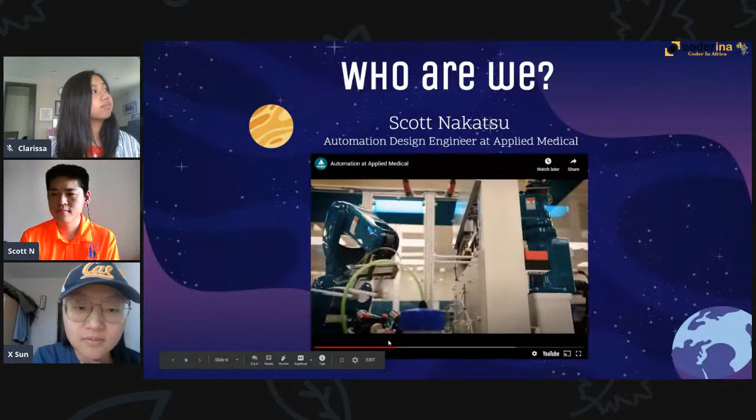Alright, cool. Thank you, Clarissa.

Yeah, so I will begin the presentation with 3D printers. So basically this presentation, the main thing I want you guys to know is the diversity of 3D printing and the many types of 3D printers. So when I first started to learn about 3D printers, I thought it was only the machine that I had seen, but after I got into it, there are actually many different types of machines that can 3D print. There might be some concepts that you don't fully get, that's entirely fine, because what I want you to get from this presentation is really to get excited about this 3D printing technology and maybe think more in the future and maybe change the industry with your knowledge in the future.

Next slide, please. So we'll begin with some types of 3D printing.

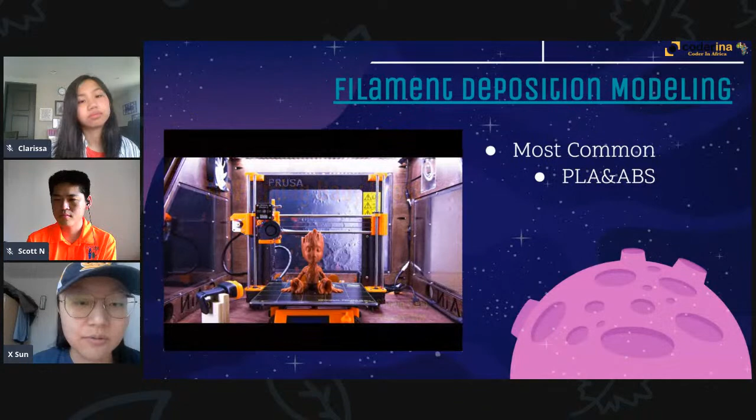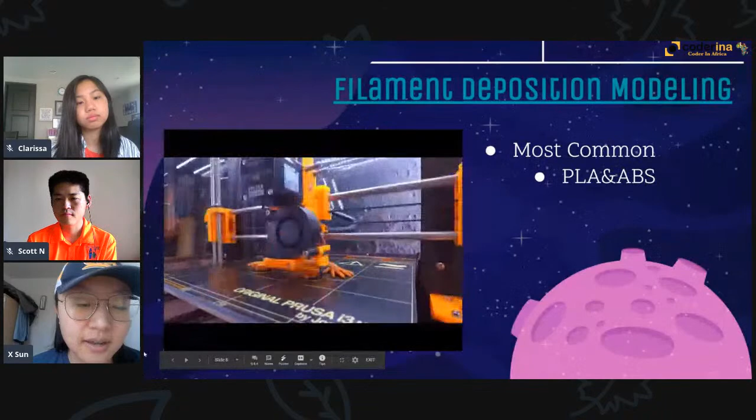So this is the first type we're going to introduce. It's called filament deposition modeling, short for FDM. It is the most common type of 3D printing. You can see how it works: there's a filament coming from the back of the machine, goes into the extruder, which melts the filament and prints layer by layer of the modeling. The material solidifies really fast, so as soon as it drops onto the model, it basically solidifies.

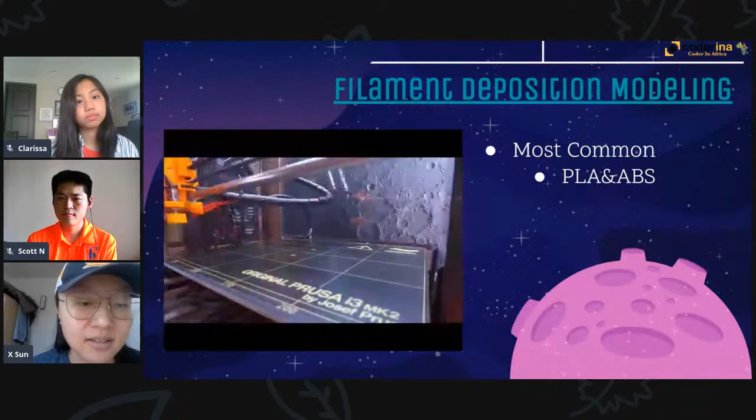A lot of people are using that right now. Many people have them at their houses. I actually have my own FDM machine, just got it a couple weeks ago, and many universities have those in their makerspace. It's really handy when it comes to practice for engineering students for prototypes.

There are mainly two materials that we use with FDM 3D printing. One is called PLA. It is more environmentally friendly, and you can usually get 1 kilogram for $20. Another type of material is called ABS. It's stronger, but might be toxic sometimes, and it's usually used with bigger machines.

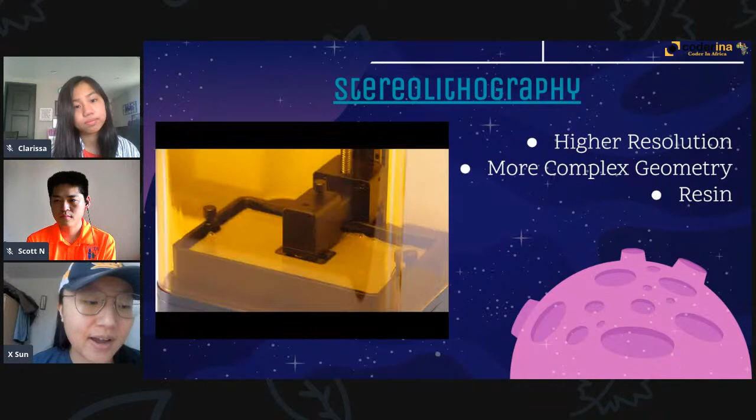Next type of 3D printing I want to introduce is called stereolithography. They use some sort of liquid resin, as you can see. In that resin, there are chemical components that can be solidified after they meet UV light. Those components are called photoinitiators. They are mixed with polymers, and that's the main component of the resin.

You can see these geometries can be printed really well by stereolithography, because if we use an FDM machine to print them, you need some sort of support material under overhung structures. Since this structure only has holes on its surface, it would be hard to get that support material out. But in stereolithography, you can just make holes and the liquid will flow out after you print. So it usually gives higher resolution than FDM, and it can print more complex geometry than FDM.

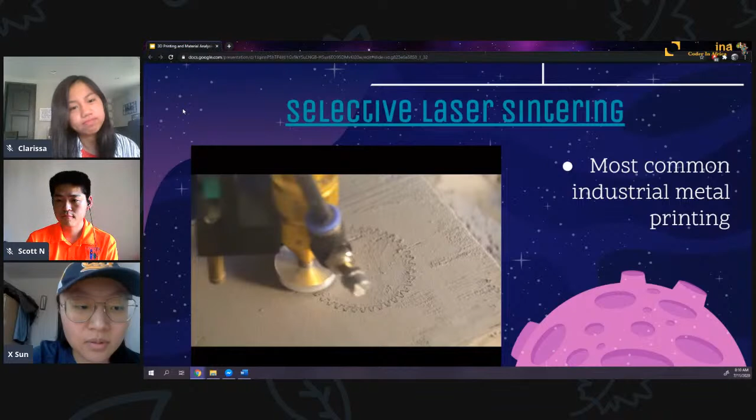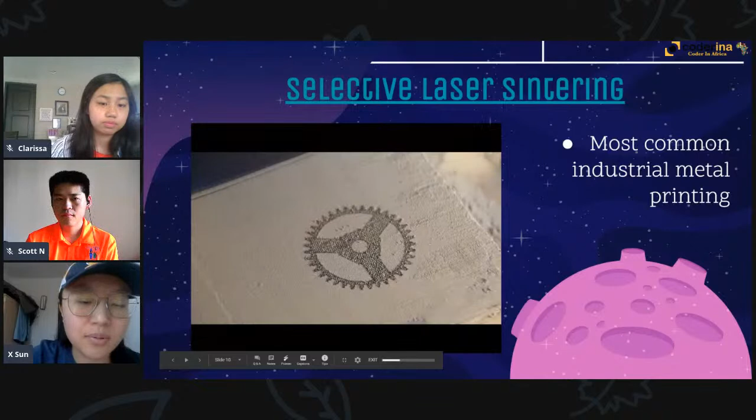So usually what you do after this is printed is melt the part. Usually the plastic melts, so there are pores in the object after you print it. That's a big disadvantage, but we don't really have better technology right now because metal usually has a really high melting point. So if you want to print fast, you need plastic inside the powder.

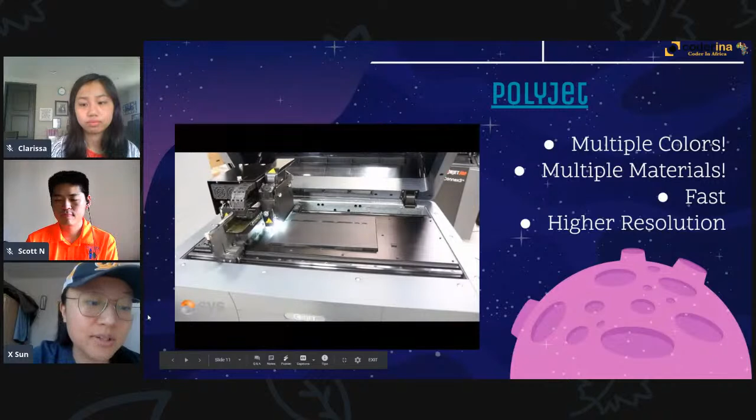Next technology is called Polyjet. It's really only used by one company, so it's not as general as those before it, but it's really cool technology because you can use multiple colors, multiple materials, and it's super fast and gives really high resolution.

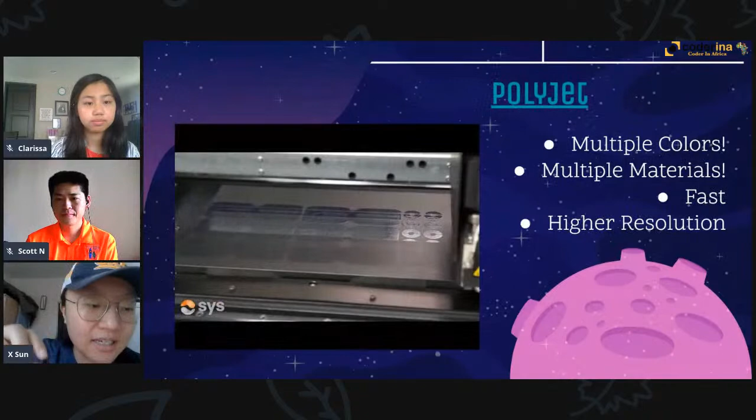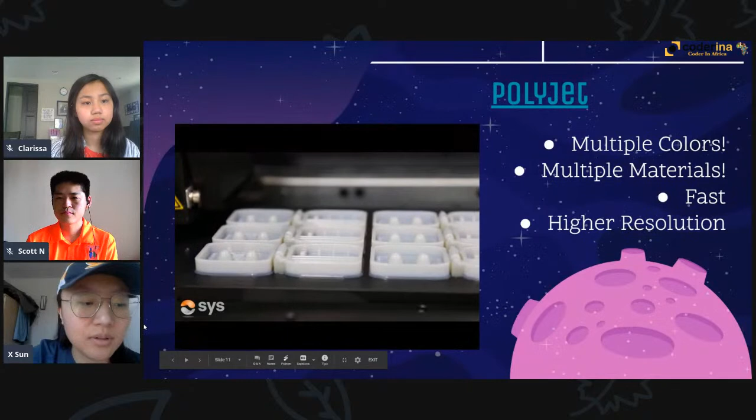How this works is really like your normal printer - a normal printer ejects ink, but this one ejects different materials for 3D printing. That's why it can eject multiple colors and multiple materials very easily compared with others. However, these types of 3D printing usually cost a lot of money because the material is more expensive, and how you manufacture those materials is more expensive because you have to make them into droplets to eject them from the 3D printer.

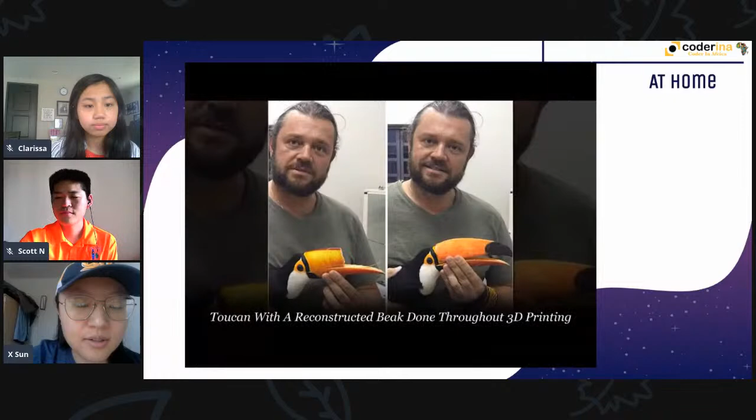So I hope you really enjoyed learning about those types of 3D printing. I want to show you some really cool stuff that you can do with a 3D printer so you can get excited about it.

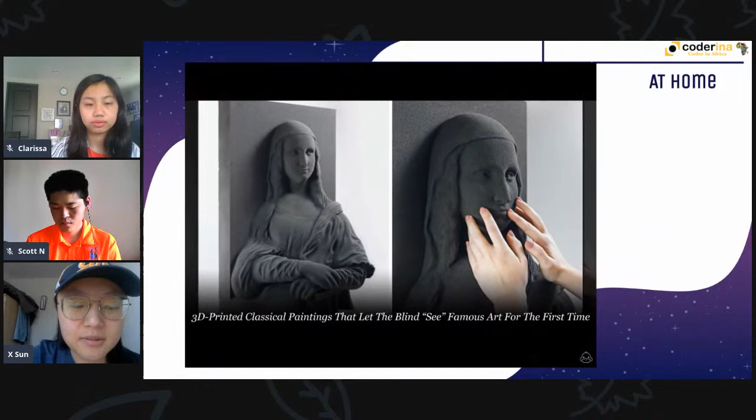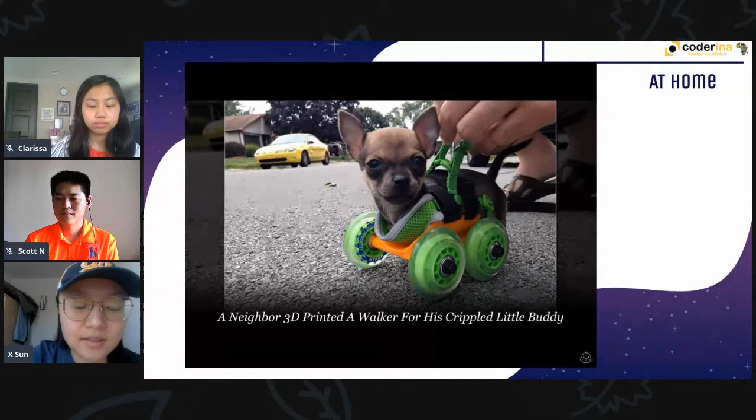At home, people are getting really creative about 3D printing. They can really 3D print everything, mostly from their house, sometimes from an industrial company. But those are some things that can be done by 3D printing really well. A lot of people make hands and legs for people who unfortunately lost them, and those legs and hands are really personalized. So it's a really big advantage of 3D printing to print whatever shape you want.

And this is a really cool thing to give your roommate. Let's see, we'll go for a couple more seconds and then we'll switch.

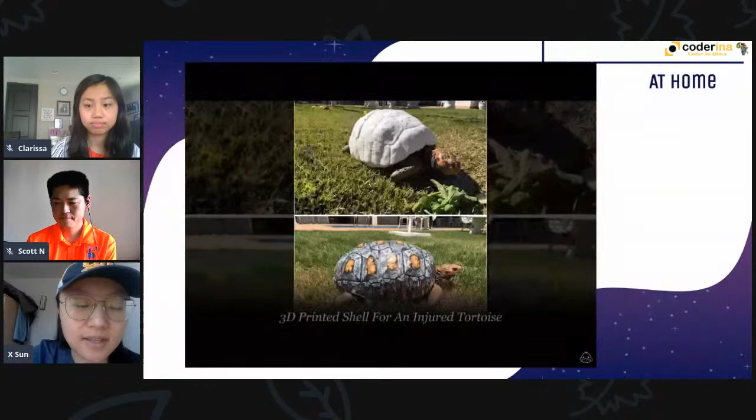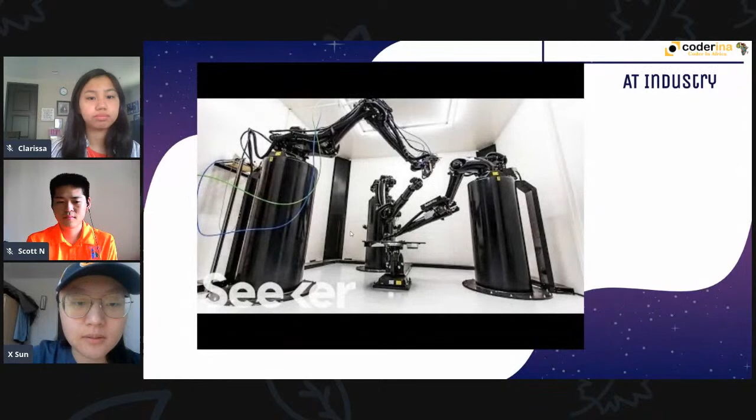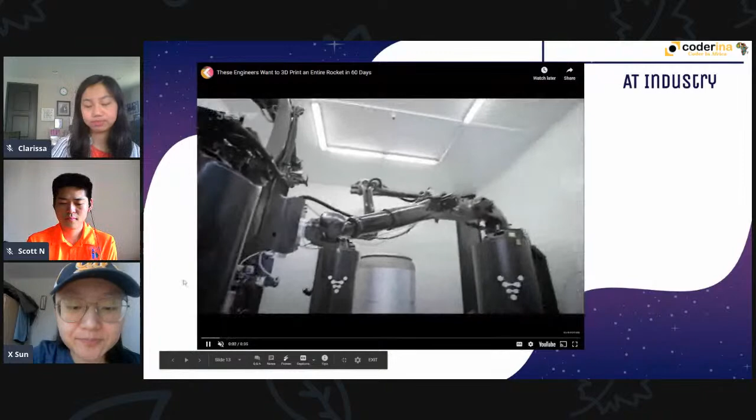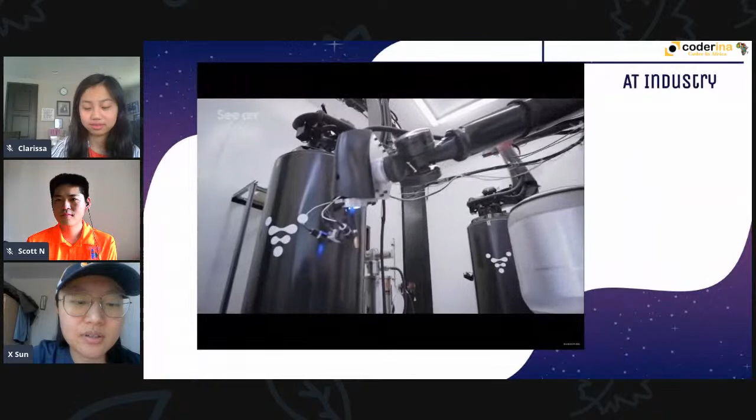So next thing I want to show you is those gigantic robot arms that are used in industry to actually print rockets. They are usually used to make rocket engines, using metals. It's like an extruder, but rated for higher temperature so they can print more pure metals. As you can see, they can print really big engines. And those robot arms, because they can rotate to various degrees, can reach many weird angles to make really fine details.

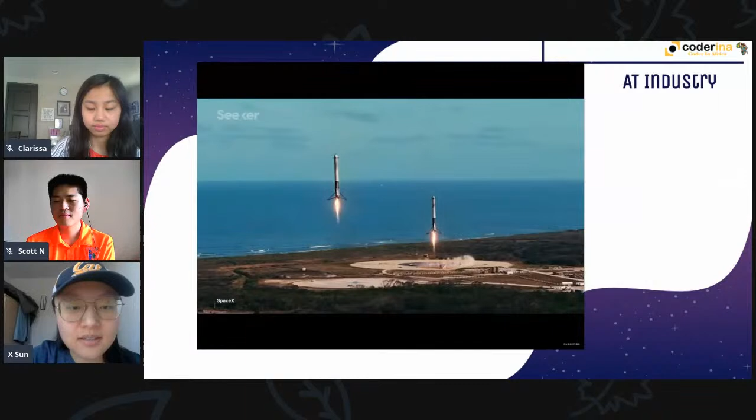Next slide, please. And if you're interested in those videos, YouTube has a lot of those videos.

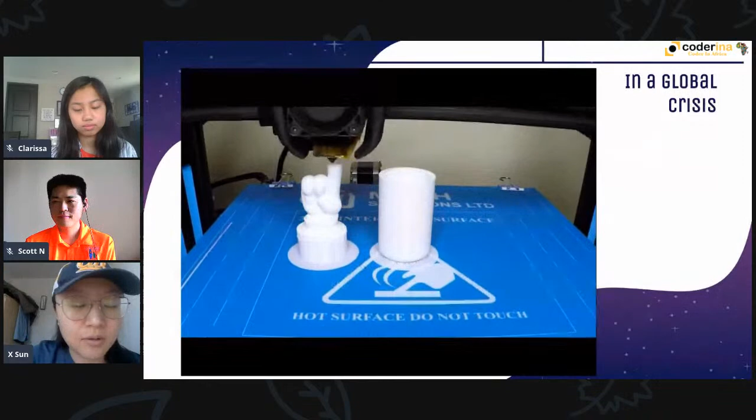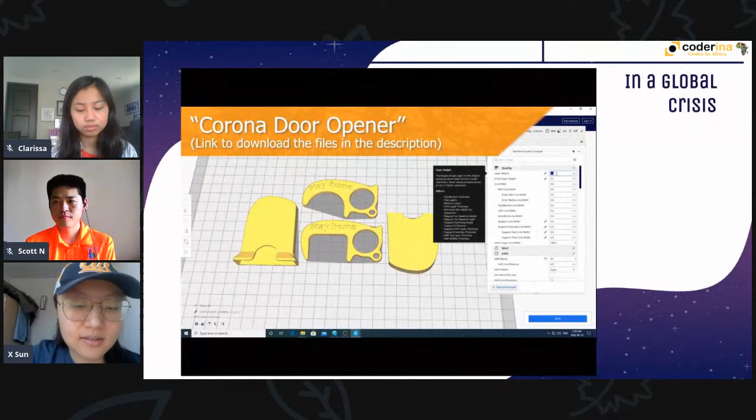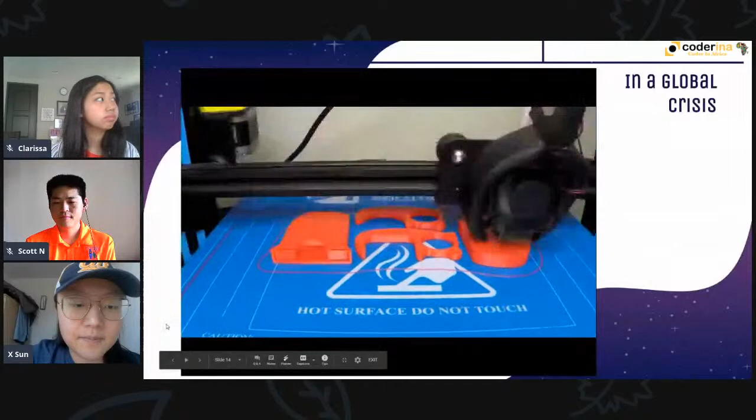So next thing, it's really hard to just ignore the global background when we give the presentation now. But some good news from this pandemic is a lot of people are really using 3D printers to help save lives. Many people are printing face shield straps for health workers and printing face masks for themselves and their friends. That's something you can really do at home, and you can print those and donate them to certain organizations, and those organizations will help distribute them to different places in the world. Actually, Code Orange just printed a lot of those face shields for many health workers in California, and I just really want you to know the power you can have and the cool things you can do with those 3D printers.

Those are door handles. A lot of people are talking about how you don't have to use your hand to open the door now. Let's go to the next slide, please.

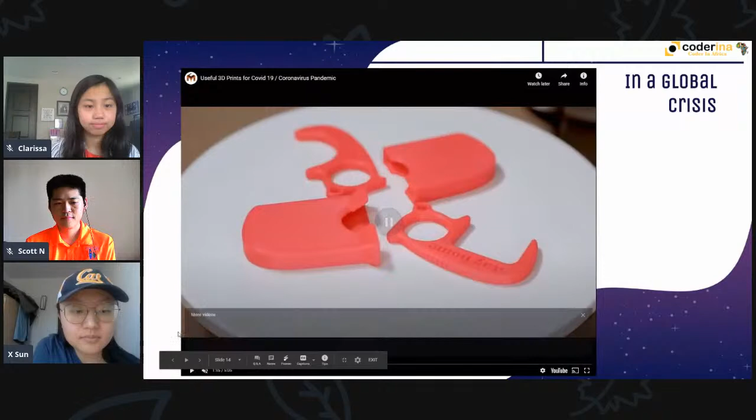So this is a really cool technology I really want to show you because I'm working on this technology right now, but this is mainly from my professor. I saw it in my freshman year orientation, and I just fell in love with it immediately.

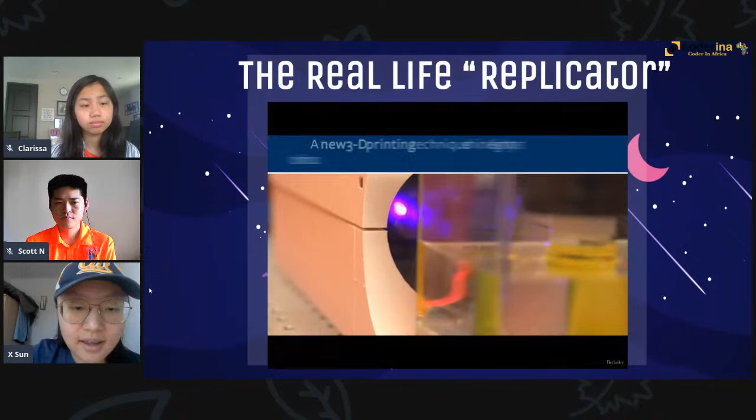It is really cool because normally how stereolithography works and how other 3D printers work is they print layer by layer. But this one, because it has a rotating bottle of resin, can actually print in true 3D. So ideally, every point in this model would form at the same time, so that you get a lot of material advantages. If you have two layers, you sometimes get shear forces that break it. But if you have those two layers really as one layer, then it becomes much stronger.

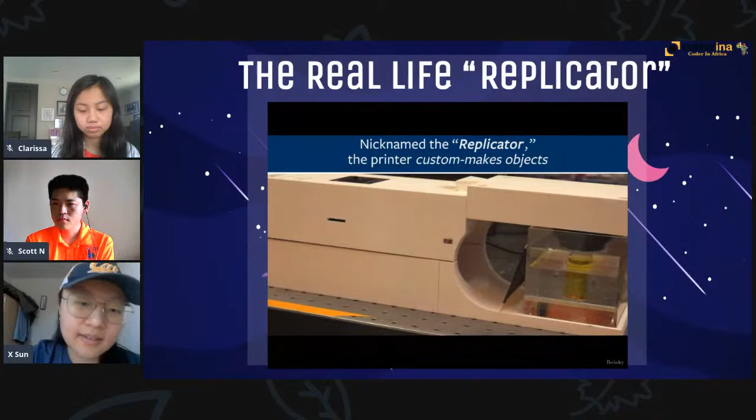And as you can see, they nicknamed that the replicator. In the future, we're really hoping that we can take whatever photos we want of a real world object, and then put that into the projector, and the projector will project UV light that solidifies those resins in the rotating bottle, so that you can just print whatever you want.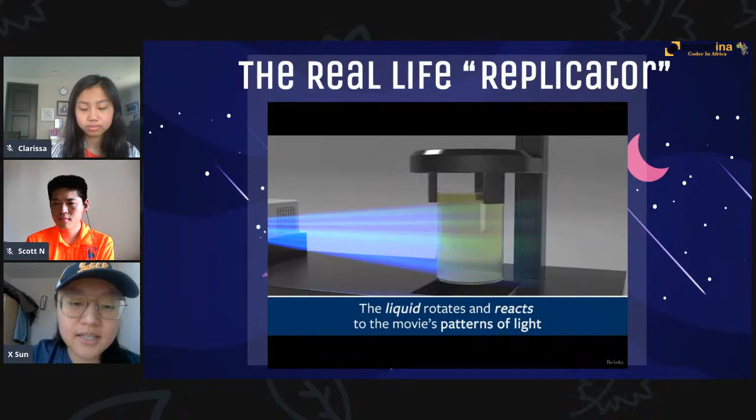And this is how they take photos and put them into the projector, which projects UV light onto the resin, and then the parts solidify based on where the UV light shines in. This sort of thing also needs a lot of software skills and a lot of optimization, as they call it.

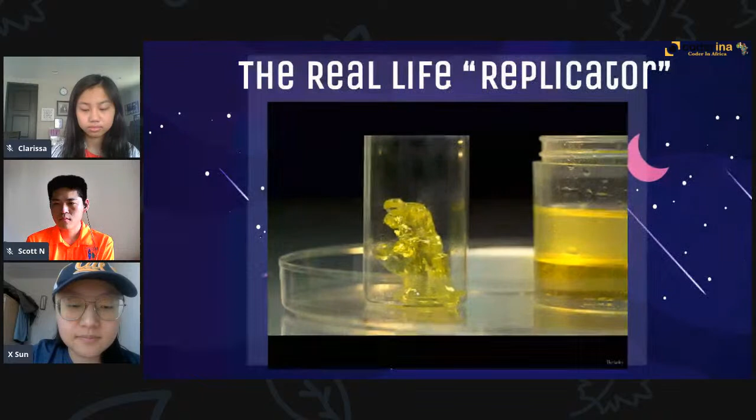Yeah, we can go to the next slide, please. I hope you're excited about it. Technology is really cool. And after we have learned something about 3D printing, I want to invite you all to think about why we really need 3D printing, why we cannot just create these objects with other manufacturing processes.

So first, I want to introduce you to other common manufacturing processes. One is subtractive manufacturing, which is really just cutting stuff out of a block of metal. Another process is called injection molding or casting. Casting is very similar to injection molding; injection molding is for plastic and casting is for metal. Let's go to the next slide.

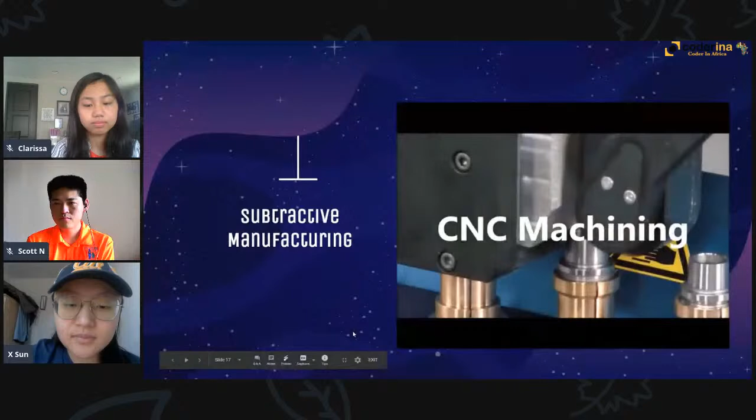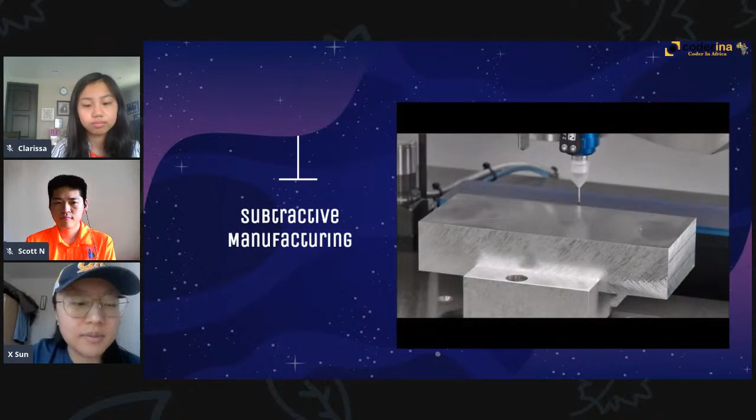So I want to show you this video about subtractive manufacturing. You can see it's really just using a lot of very cool tools to cut those big blocks of metal, using something called a CNC machine. It's computer controlled; you can create a program that tells those tools where to go and where to cut. Many universities and FRC teams have those CNC machines. It comes in really handy and is more accurate than cutting by hand. So you can see they just cut them.

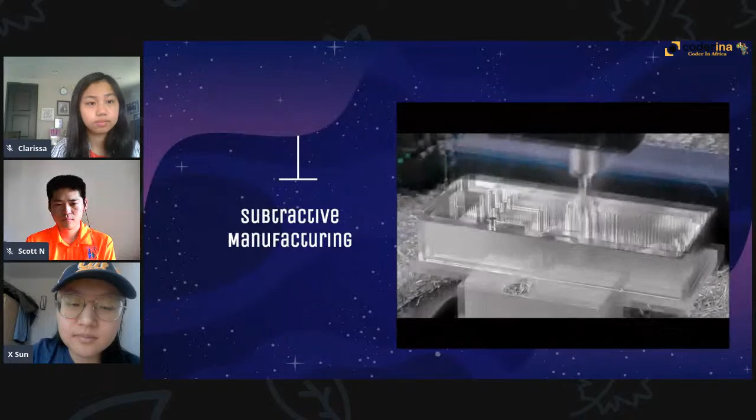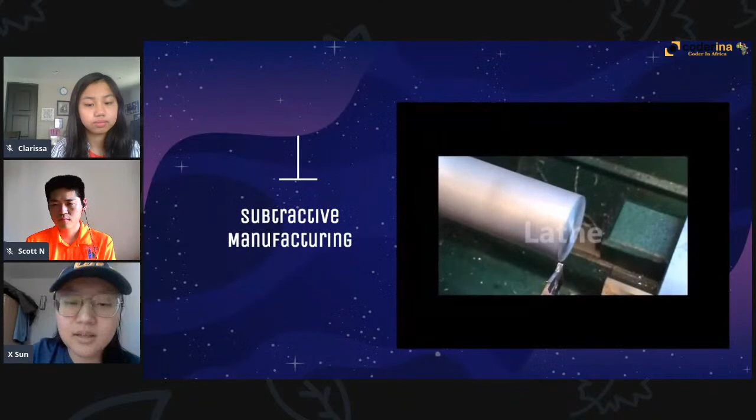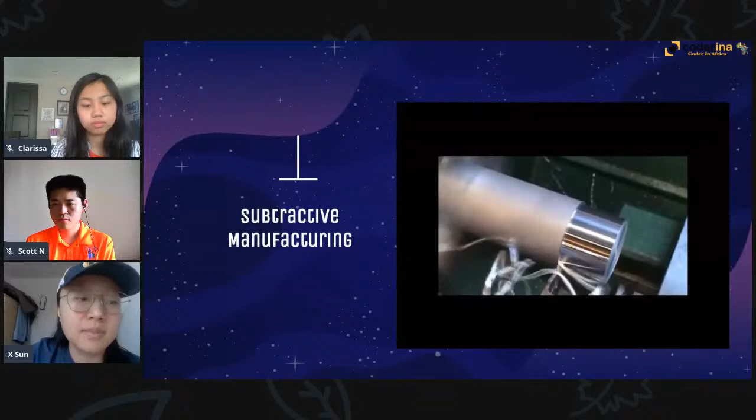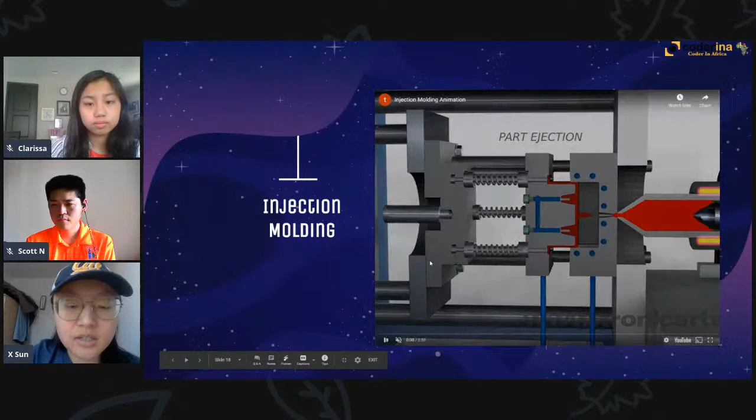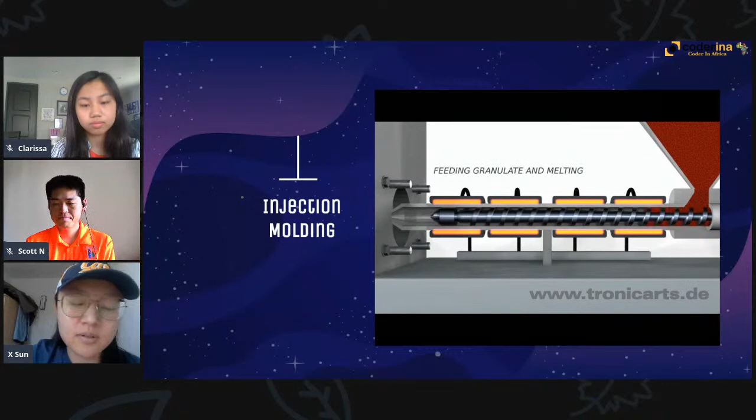Can we go to the next slide please? So next slide I'm going to show you a video of injection molding. Can we go to the middle of the video again? So injection molding is basically you have a shell, and then you inject either liquid plastic or liquid metal into the shell, and after it solidifies, it just becomes whatever parts that you want it to be, whatever shape. So most plastic objects that you're using right now are really made by injection molding because it's so cheap after you make the tools, make the model.

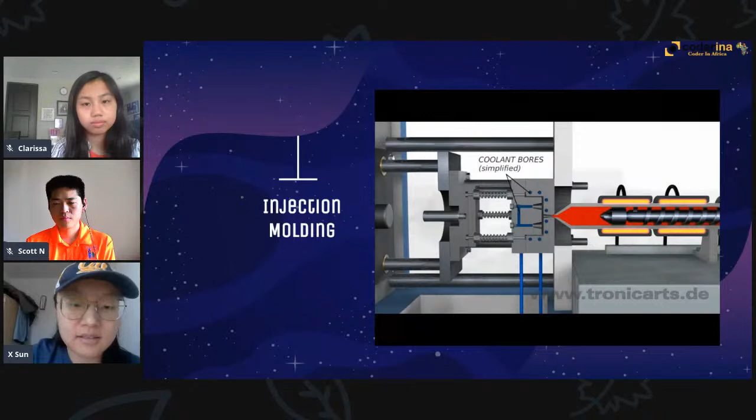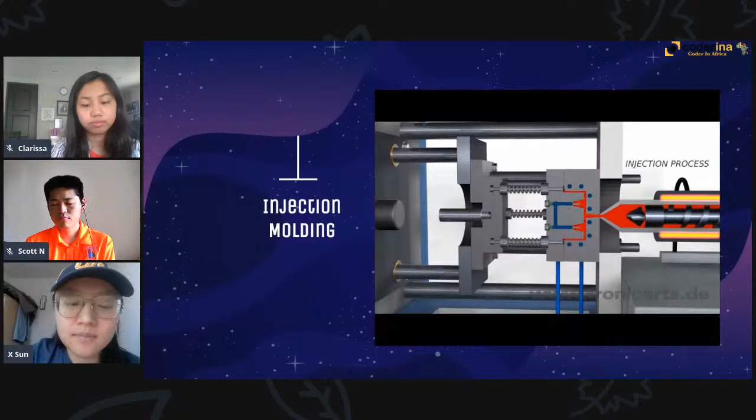Usually the model is the most expensive part, but after you make the model, each part maybe just costs a couple cents. So you can see the red part is the melted liquid plastic, and they're injected into the mold. Then after it's cooled, the cooling process time is usually really fast, especially if there are small parts, and they are ejected. Yeah, so that's how injection molding works. Casting for metal works in a similar way, but a little different.

Next slide please. So after we learned the subtractive manufacturing and the injection molding, I really want to show you why we choose 3D printing in some manufacturing processes. So the first advantage is really the personalization, customization process.

They may have to wait for a really long time, sometimes a decade, and they don't really have time to wait for that. So 3D printing is really trying to customize those for people who need to replace their organs. For example, if I need a heart to be replaced, they can take a cell from me and just print a heart that would fit right into my body, so my body doesn't reject it. That just increases safety so well.

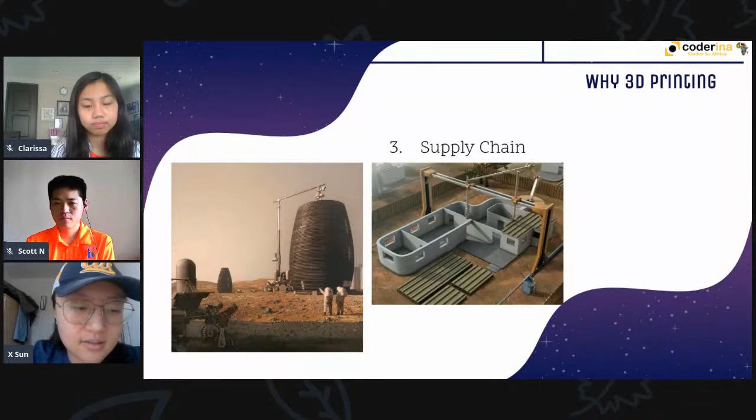The last advantage I want to introduce is prototyping. A lot of college engineering students, including FRC students, use 3D printing to print parts they want to test, because you can see them really fast. You can figure out if they're actually working well. If not, you can just change the model on your computer and print them again, because this process doesn't cost a lot of money and it's easy to access 3D printing in many regions globally. So a lot of people are really using those to prototype.

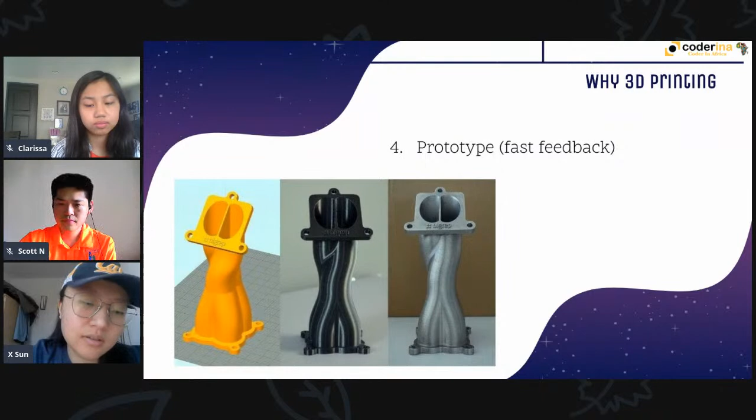After learning those advantages, I want you to think about how we can change this industry in the future and maybe improve it. The biggest challenge in 3D printing right now is first, time — it takes a really long time to print a part compared to injection molding or subtractive manufacturing. Also, it uses a lot of power, so it's not really environmentally friendly. And material — you're very limited by material. It's not environmentally friendly if you use a lot of plastic, and there aren't many material properties available in 3D printing that give the desired outcomes engineers want. You might get much better materials using subtractive or injection molding manufacturing.

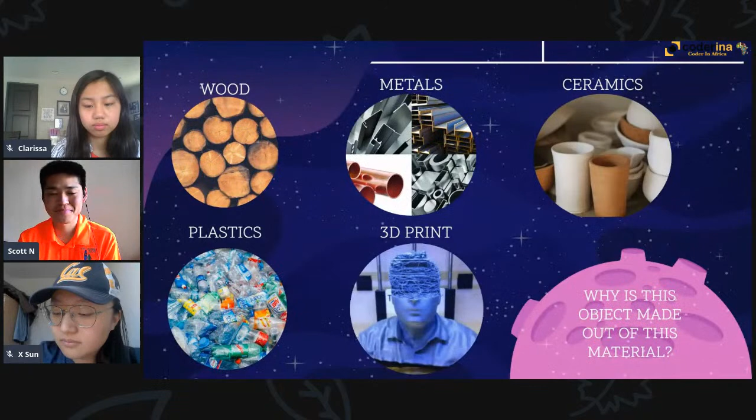The next five slides are going to ask some questions. As we go along, I want you guys to think about these, or if you know the answers, feel free to pitch them in the live comments. If we have time at the end, we'll go over why these objects use these materials.

The first question is, why do cars use metal, and why not use a plastic frame since it's cheaper? Just think about these as we go along.

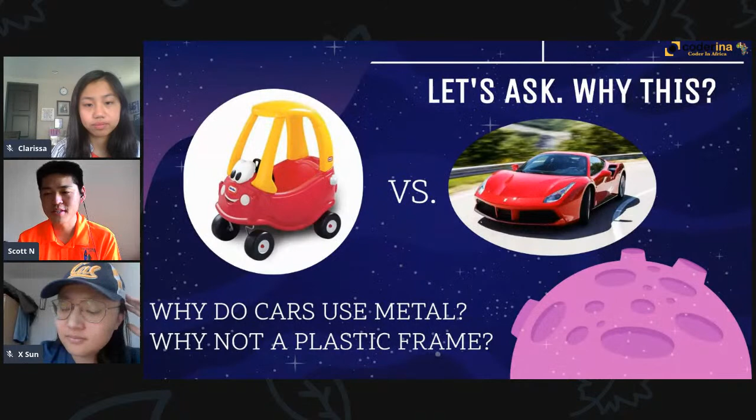How come we don't have plastic houses? Why do we see homes using brick or wood or stuff like that?

Have you ever seen a chair made out of ceramics before, or mainly wood or mainly plastics?

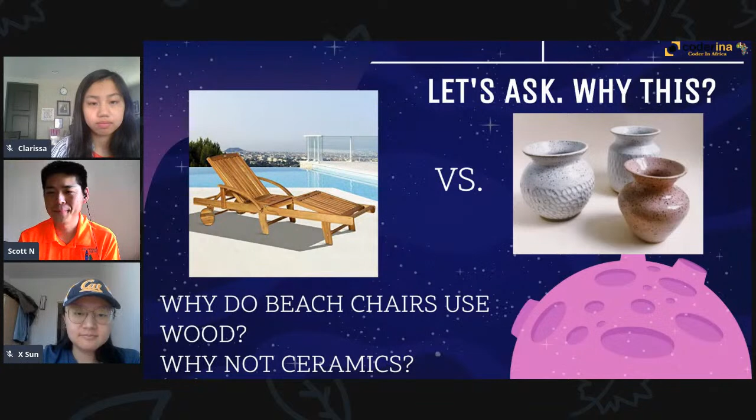Have you ever seen a car intentionally have a plastic windshield? Why is it usually glass?

And we have one more: have you ever seen a wire made out of wood before, and has it worked well? Different materials have different properties, and we'll go over those as we go along.

So the first slide here, we're going to be going over stress and strain - basically telling us how strong these materials are and how resistant they are to different changes in their environment and when we push and pull them. Next is their properties, and then last we'll go over why this information is even useful. So we'll start with the first part, which is talking about what is stress.

Stress, as defined by the dictionary, is the amount of force on a small area inside of the material. Really, what this breaks down to is how much force an object experiences when we pull or push on it or bend it. The basic formula is: stress equals force divided by cross-sectional area. Stress is usually denoted by the letter sigma, the circle with a line on top.

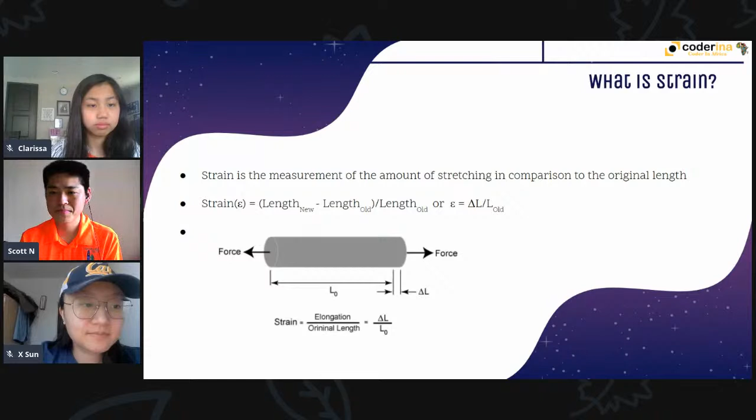So similar cylinder - we have a cylinder that's 1 meter long, and once we pull on it, it becomes 1.5 meters long. Using our equation, we have our new length of 1.5 meters, subtracted from the original length of 1 meter, divided by the original length of 1 meter. This gives us 0.5 meters divided by 1 meter, and the units cancel out, giving us a strain of 0.5. I know those are very arbitrary values, but the next few slides will connect these random values and put meaning behind them.

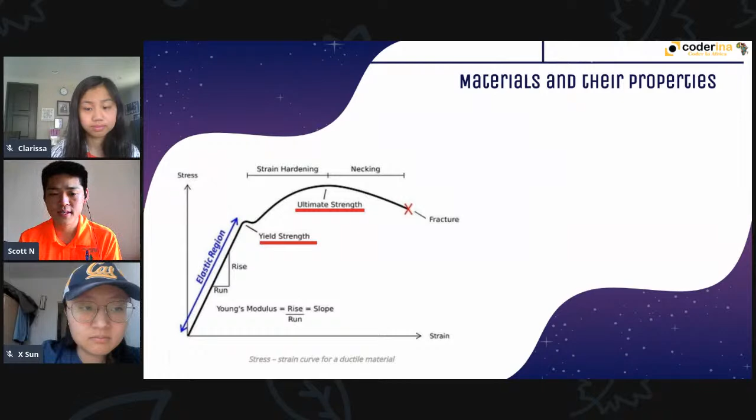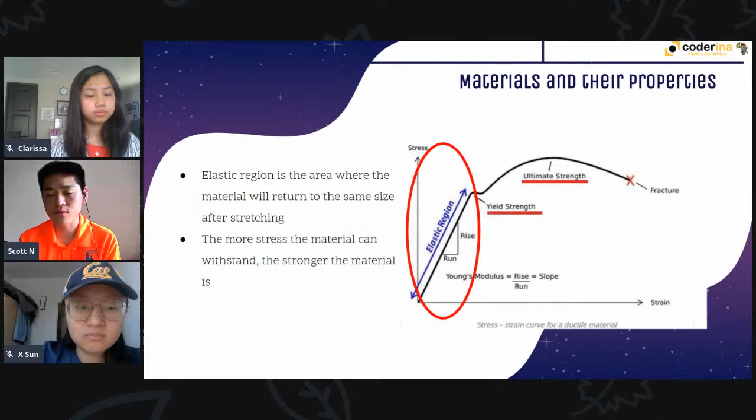This first section, highlighted in the red circle, is the elastic region. When we pull on an object, sometimes it'll retreat back to the same size - that's what the elastic region tells us. For most materials, the uppermost amount of stress you can apply to a material is called the yield strength, and a simple Google search will tell you the yield strength. Say I wanted to look up the yield strength of aluminum - searching that will give you an amount in gigapascals. Remember, pascals is a unit we use to describe stress. So it tells us how much stress and strain we can apply to these materials before they break.

One other thing before we move on is something called Young's modulus. What Young's modulus does is it relates stresses to strains. So the equation here is stress is equal to Young's modulus times strain.

You can figure this out empirically by getting a stress strain curve and then measuring the slope of the elastic region. I don't suggest you do it, it's probably not going to be very accurate. Usually Young's modulus can be found in a table or diagram made by scientists who have already done this work.

So the next chunk of the stress strain curve is called the plastic region. The plastic region says that anything beyond the elastic region, we're going to have permanent deformation or permanent stretching.

I'm sure you've all seen this before, where you've pulled on something and it came back to the same size, but then you pulled too far on it and now it's no longer able to go back to the same size again. So that's what the plastic region is.

It's permanent stretching. If we look at the graph, usually you'll have a lot more stretching in this section versus the elastic region. So if you look at the stress portion, you don't really gain that much strength or extra stress that you can withstand, but it really does stretch out in terms of the amount of strain you can see.

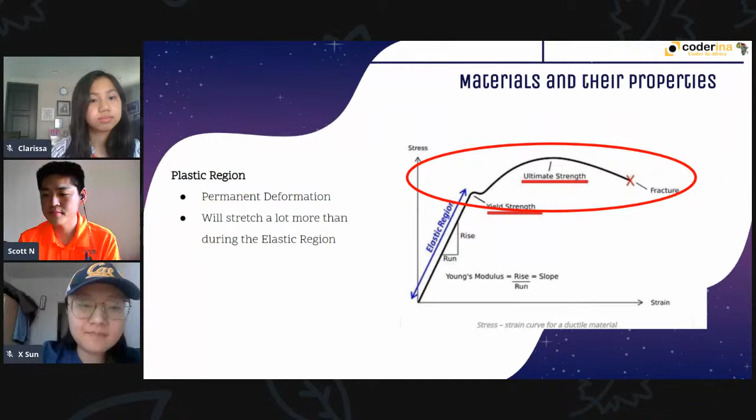So one other point: we had yield strength in the elastic region, but in the plastic region, we have ultimate strength, which is the maximum amount of stress an object will be able to withstand.

Usually, in most cases, engineers will use yield strength as our determination of whether or not a material is good enough for the job that we're doing.

This is because, imagine you had this really tall building, and it withstands an amount of force, say during an earthquake. If we relied on ultimate strength as our boundary here, we could have a building that may stand up, but may also be 5 or 10 meters bigger than it was before. And that's really not something you want or can trust.

So for most cases, when determining the durability of an object, we really want to use yield strength, but knowing ultimate strength is good to know as well.

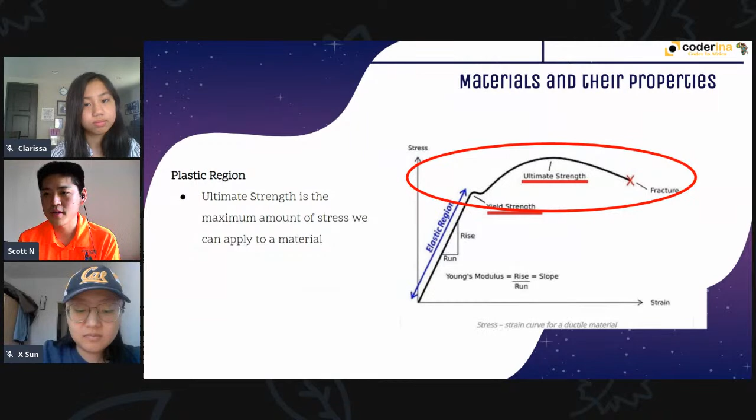I've been talking a lot about numbers and graphs, but I think now's a good time to bring in how we actually test these materials. So we have a short video about how we actually test these things.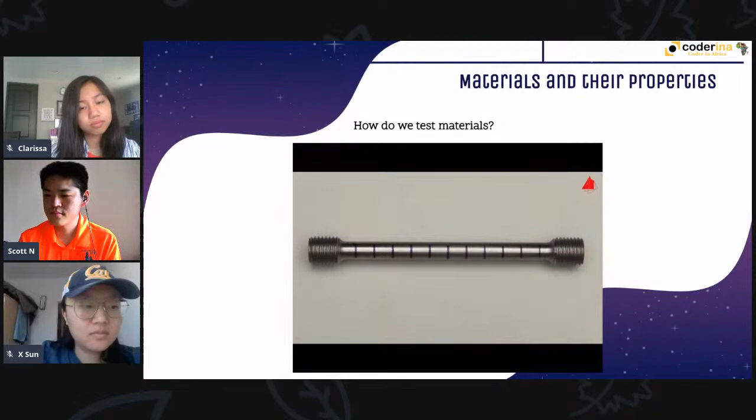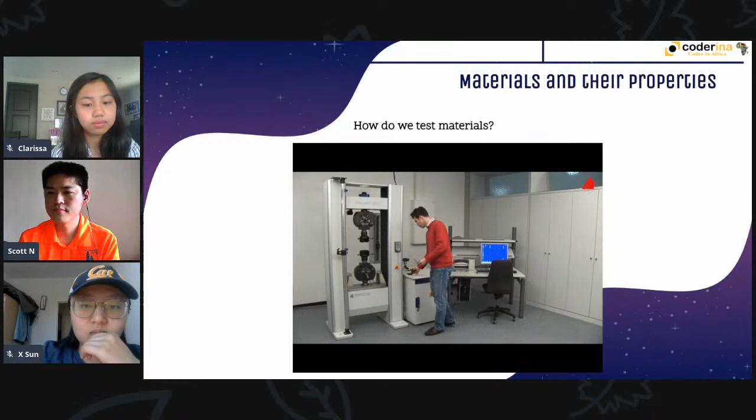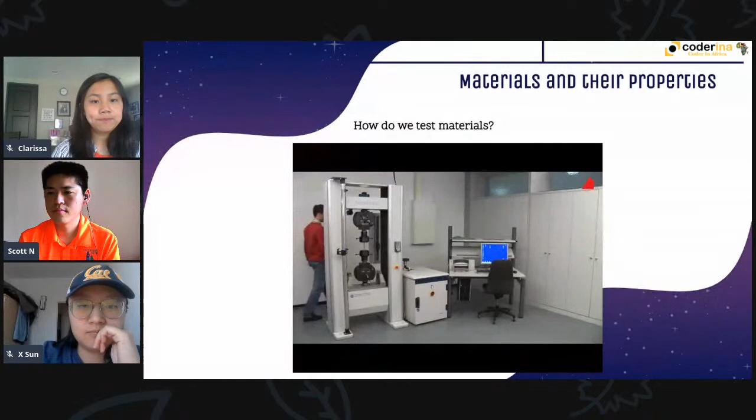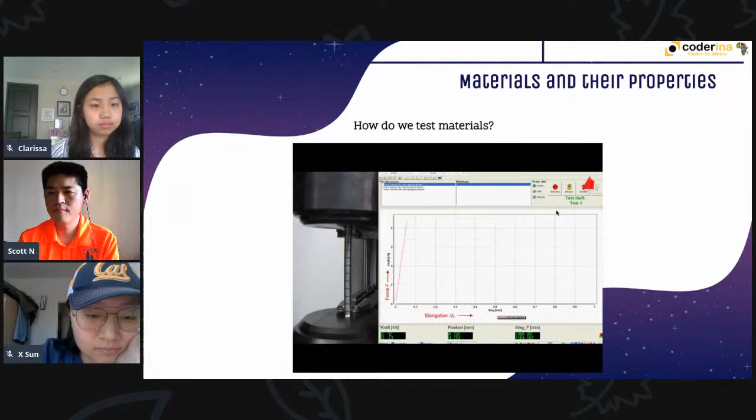Material with yield point phenomenon. In the first tensile test, a plain carbon steel with yield point phenomenon is to be tested. This is the test piece. It has a cylindrical test region with an original diameter of 10 millimeters and an original gauge length of 100 millimeters. Within this test region, distance marks have been drawn at regular intervals. They help to visualize and measure the plastic behavior of the specimen. Using a hand control, the tester moves the upper crosshead into its correct starting position. Now he can place the threaded ends of the test piece in the lower and upper grips of the testing machine. In the next step, he swings the extensometer into its working position and checks that everything is correctly prepared. Then he selects all necessary testing parameters on the control computer. Ready. The test starts, and the extensometer's sensor arms are carefully pressed onto the test piece. This way, the gauge length can be measured throughout the whole tensile test. The gauge length is displayed at the bottom right-hand corner of the screen. At the beginning, it amounts to 100 millimeters. During the tensile test, the test piece is slowly and constantly elongated with a standardized speed. The force that the test piece opposes to the imposed elongation is recorded and can be seen at the bottom left-hand corner of the computer display. The material behavior can best be observed in a force elongation diagram. The force F is being plotted upwards on the vertical axis, the elongation delta L towards the right on the horizontal axis. At first, the force rises rapidly. Force and elongation are proportional and form a steep, straight line in the diagram. In this area, the material behaves elastically.

If the test piece were to be unloaded from this area, it would spring back completely to its original length. In materials with yield point phenomenon, the end of the elastic area can be seen clearly. The plastic deformation starts abruptly and is accompanied by a sudden drop of force.

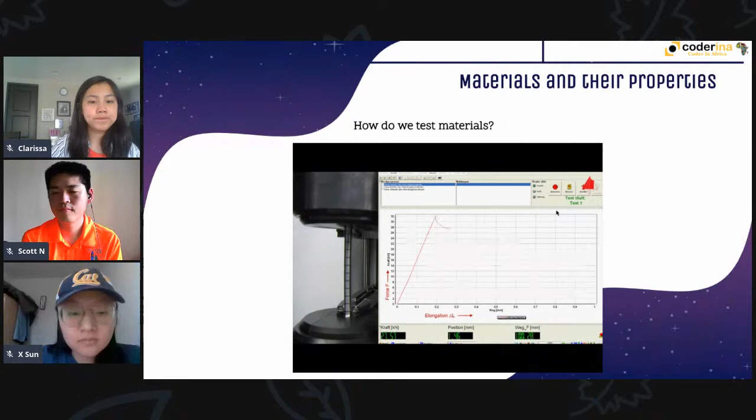If the test piece were to be unloaded now, it would not spring back to the original length, but instead show a permanent elongation. In the next stage of the tensile test, an almost constant force level with slight fluctuations occurs.

After a certain strain, known as the Lüders strain, the force increases again. The material opposes an increasing force against the imposed elongation. It strain hardens.

Up to the point of maximum force, the test piece is strained uniformly along its length. This means that the test piece gets longer and thinner, but keeps a cylindrical shape.

As soon as the maximum force is reached, a neck begins to form at one point of the test piece. All further plastic deformation now only takes place at the neck, and eventually the test piece fractures there.

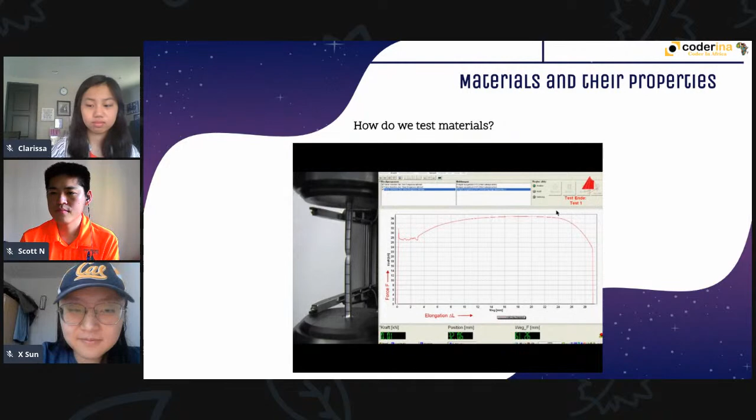In the recorded force elongation diagram, the force FeH at the upper yield point can clearly be seen. This is the highest force the test piece can sustain elastically.

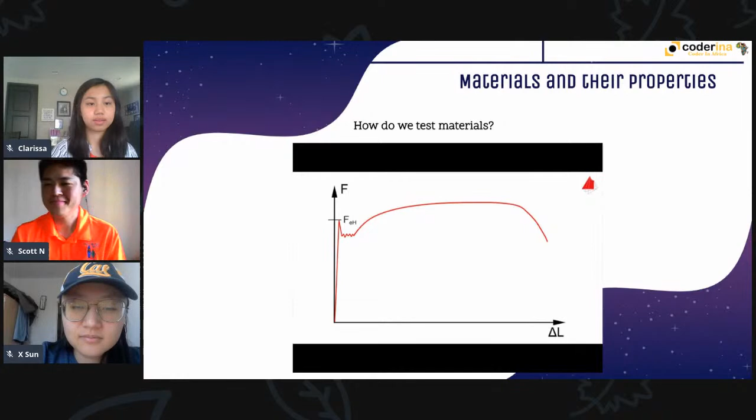FeL... Hey, Clarissa, can you pause the video right there?

At the lower yield point.

Thank you. So again, this graph, which they made on their own with their own testing equipment, looks very much like our stress strain curve, because you have the elastic region, you have the plastic region, and then the very tail point is the fracture point.

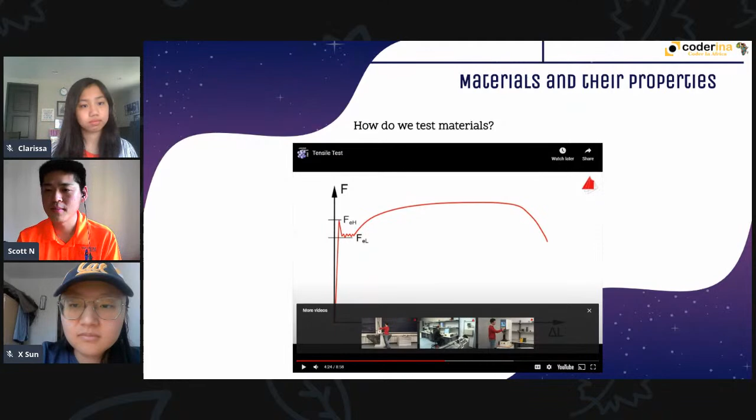This is how scientists test different materials and find out what their yield strength or plastic deformation range looks like. And that's how we kind of figure out these values.

Next slide, please. So now we know the general basics, let's talk about individual materials. This slide should look familiar. It has our wood, metal, ceramics, plastics, and 3D print groupings, and we'll go over each of them and their different strengths and weaknesses.

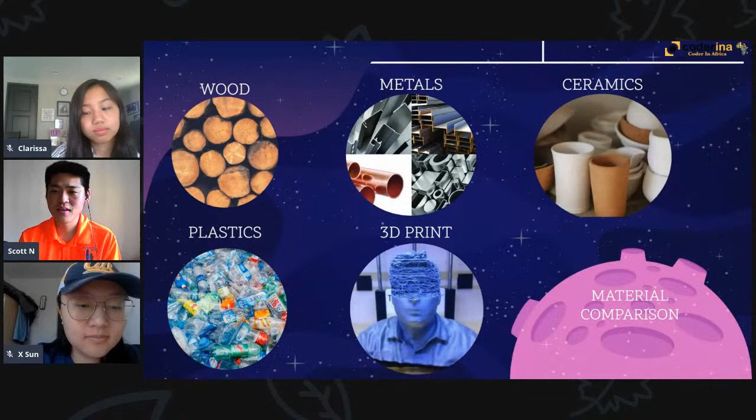Next slide, please. So first up is the metals category. These are going to be some generalizations about the category. They're not always true, you can find metals with varying properties, and that's going to be the case for most materials. We're going to be going over generalizations, but not specifics, because ultimately you can find a super lightweight metal that's probably lighter than the heaviest plastic.

But again, some generalizations: they tend to be pretty strong, but they also tend to be pretty heavy. And one of the cool things about metals is that you can mix different elements or different metals together to get whatever properties you really need.

So say you don't want something to rust, you can add in different compounds to make a non-rusting stainless steel. Or say you want conductivity, to transmit electricity from point A to point B, then you're going to want something like copper, which has good conductivity.

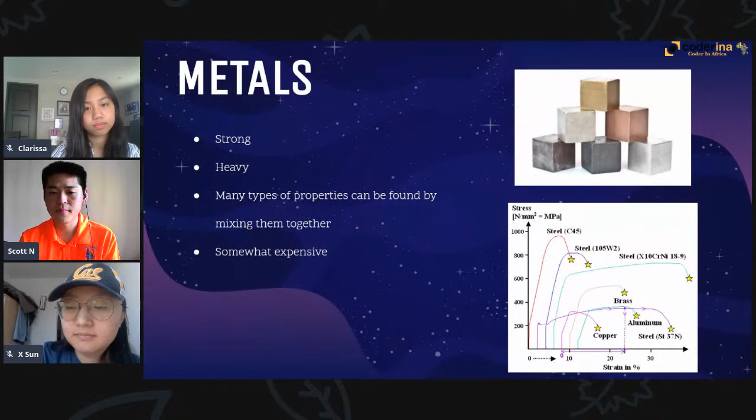So again, metals can do a bunch of different things, but ultimately, compared to other materials, they're pretty pricey, and they're pretty heavy. Can I get the next slide, please?

So the way wood grows is that you have layers in the trees. If you pull on the ends of the layers or push on the ends of the layers, you get a pretty strong material, but if you start splitting the layers, it just kind of falls apart. So when using wood, you need to think about what directions you're fastening the wood with, or what kind of forces you're going to see on your projects.

So some other things you can look at here: again, you can find really heavy wood or really super light wood as well. Materials can fluctuate between the top and bottom ends of the spectrums in terms of their generalizations, but generally they're pretty lightweight and relatively cheap. You can find wood basically anywhere, even in a tree. Next slide, please.

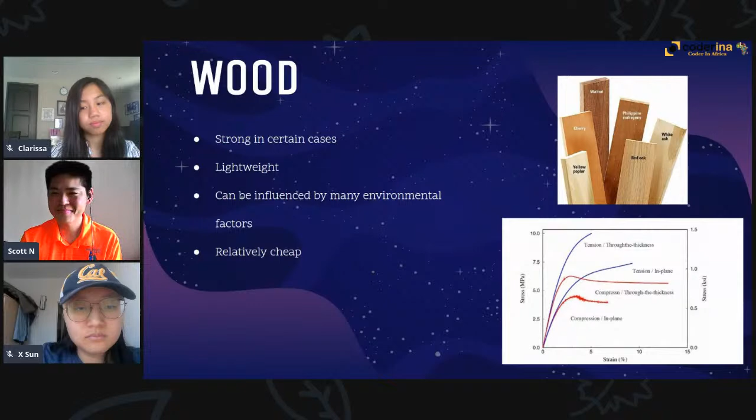Plastics are next. Again, some generalizations about plastics: pretty lightweight, and they are engineered to be one of the most versatile materials. So some things to think about: you can have a plastic that's super, super stretchy, or you can have a plastic that's super, super tough.

And it depends on the chemical composition of these plastics, and that's why people make lots and lots of money as chemical engineers that design these plastics, because they can be so different depending on their chemical makeup.

One thing about plastic is that if you are creating plastic objects one at a time, it's going to cost you a lot. But as mentioned, if you're doing injection molding, it's so cheap. You can see a plastic bottle everywhere, and those don't cost you a fortune to have. So volume is important with plastics. The more you make, the cheaper it is, as is with most materials, but even more so with plastics.

Next up is ceramics. We're thinking like the same ceramics as a clay vase or a pot of a certain clay variety, and they're really strong and they're really great, and they work until you drop them once, at which point they're no longer useful to you and they're in like a million different pieces. But again, they're strong until they break.

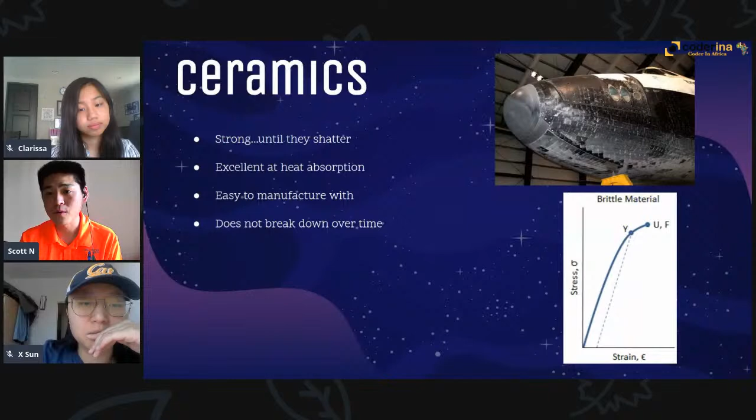So last up, we're going to talk about 3D prints. If you use the same plastic and make the same object, say a plastic water bottle, from a 3D printer versus injection molding, the 3D printer will always be weaker. And that is because of the manufacturing process behind it.

The manufacturing process for a regular average plastic bottle is just one uniform piece of plastic. But as soon as you start 3D printing, just like wood, you have layers stacked up on top of each other. So we have to be very careful about the way at which we expect these things to work.

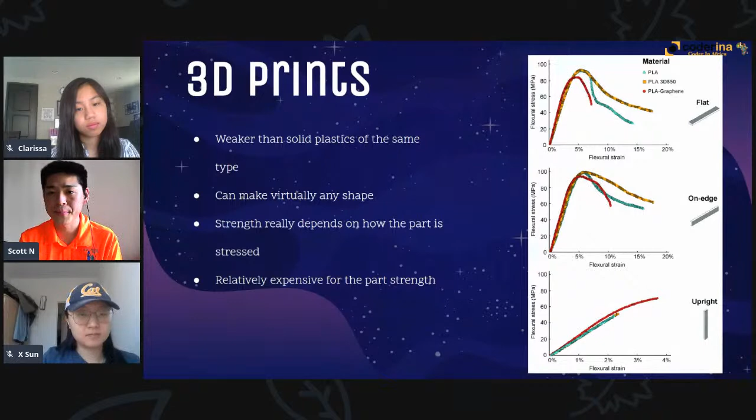Let's see, I think that's it for me.